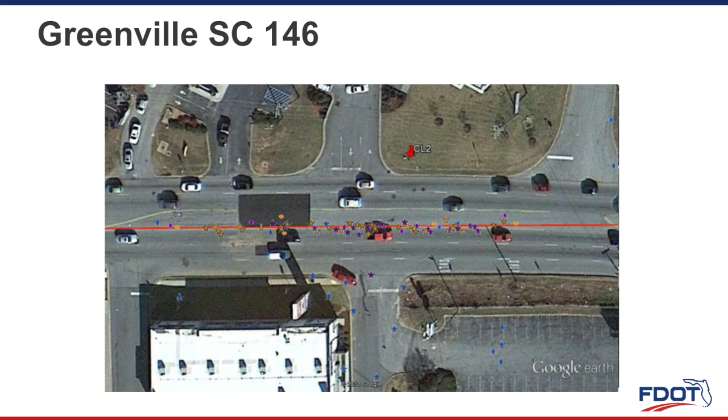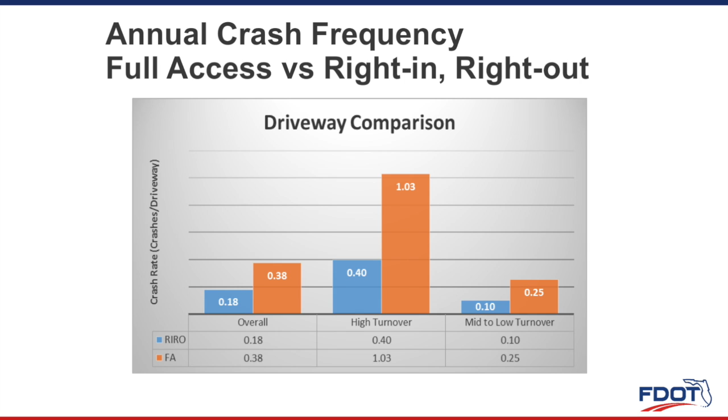And so one of the things that the DOT wanted was facts, to bring back to the businesses and the developers to say, hey, we have data that shows, from a safety standpoint and even operational standpoint, what your business, that driveway will do. Trying to give the DOT ammo to say no, or to say you need to redesign it. So that was the biggie.

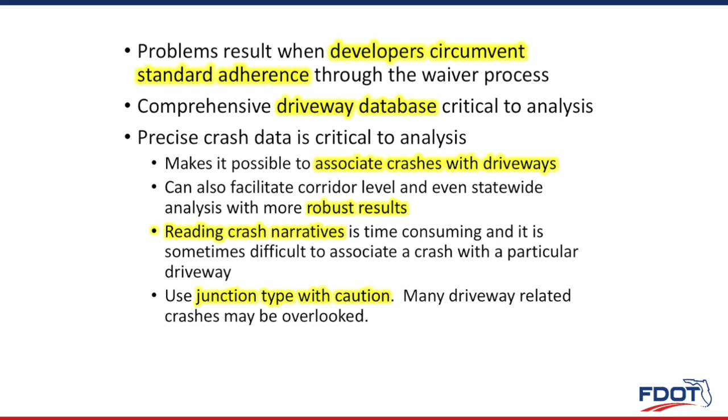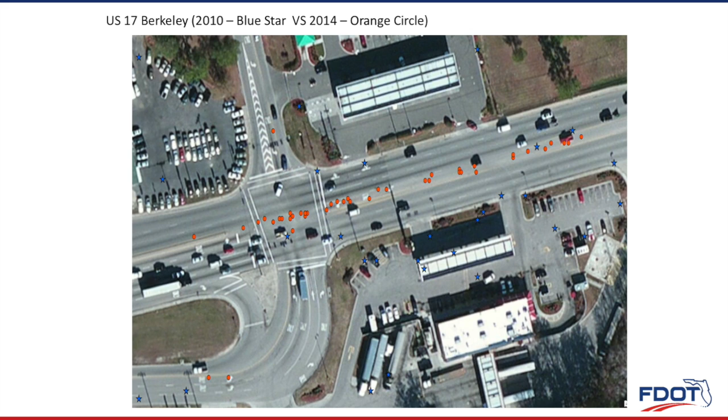Other things, the driveway database that we developed was awesome. It was really big. And then precise crash data is critical to everything that we've done on this project. And now we're going to get a follow-up study to look at how South Carolina DOT can change how they screen crashes and how they identify clusters and safety using precise crash data.

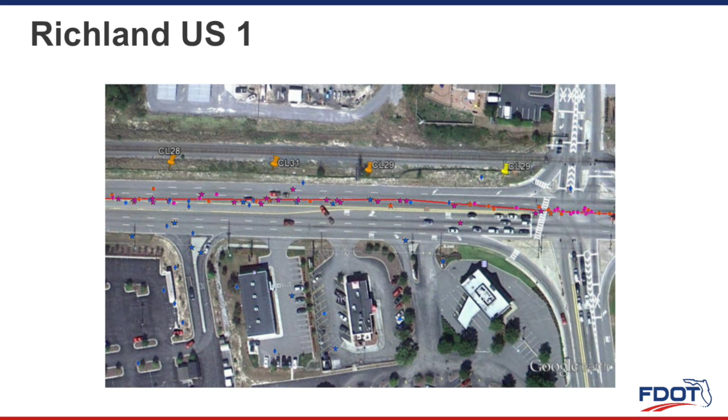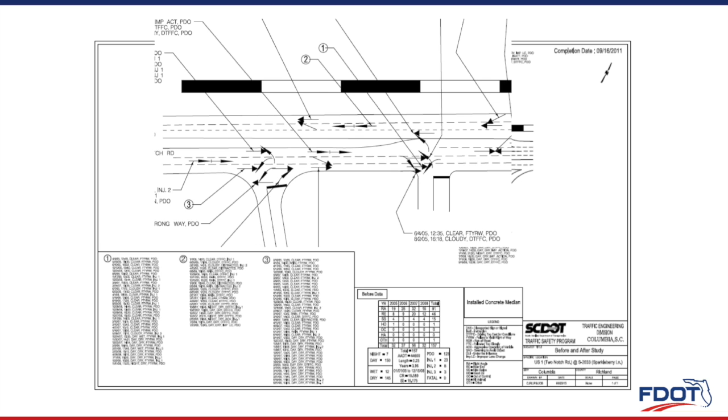So we're going to take a closer look at the benefits of having precise crash data to crash analysis and how it could facilitate different types of crash analysis. Reading crash narratives to draw collision diagrams is just time consuming. And then we found that junction type, it'd be great if the officers were a little bit better trained about how to universally code junction type.

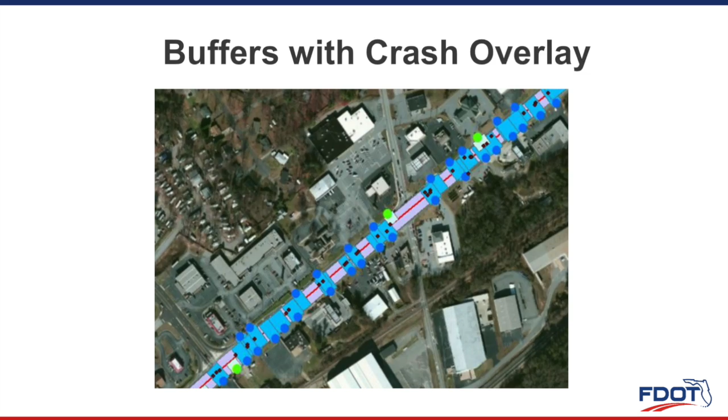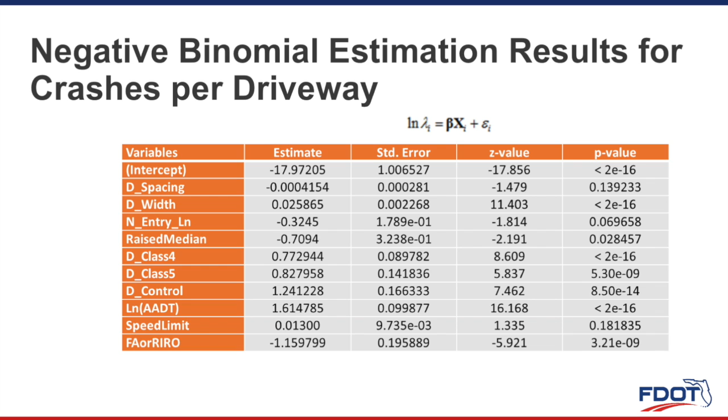Other findings, medians are great in terms of lowering crash rates. Crash modification factor, lower crashes by at least 50% is what we've seen. Right-in, right-out driveways are great because they eliminate conflict points. Again, can reduce crashes by more than 50%. I just want to mention, though, about right-in, right-out driveways.

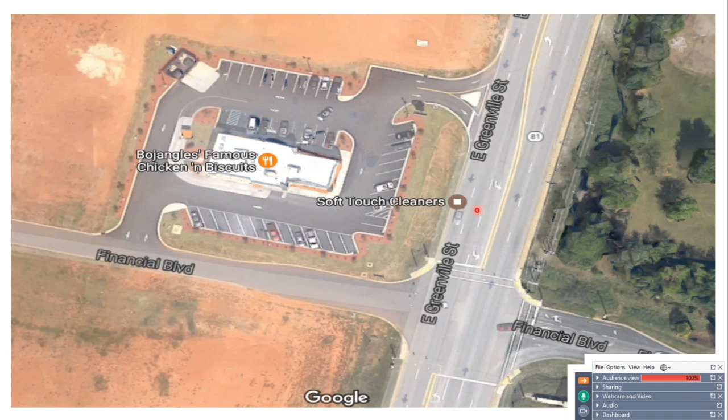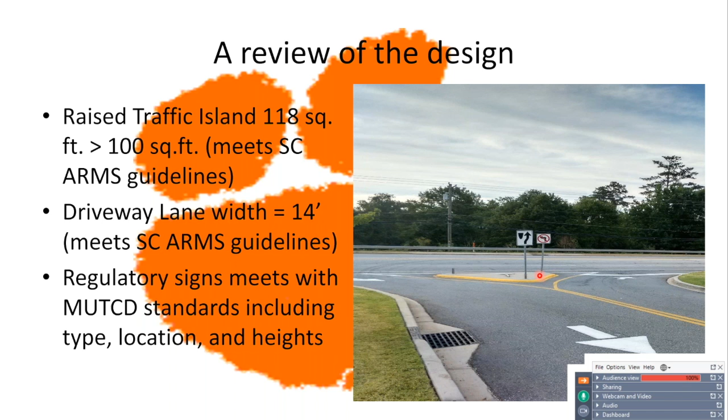When we did our analysis for this year, we used right-in, right-out driveways from the standpoint of medians and then also other types of right-in, right-out driveways. For example, a raised pork chop island without any sort of centerline barrier or delineator, and then other types with just painted islands, some signage and things like that.

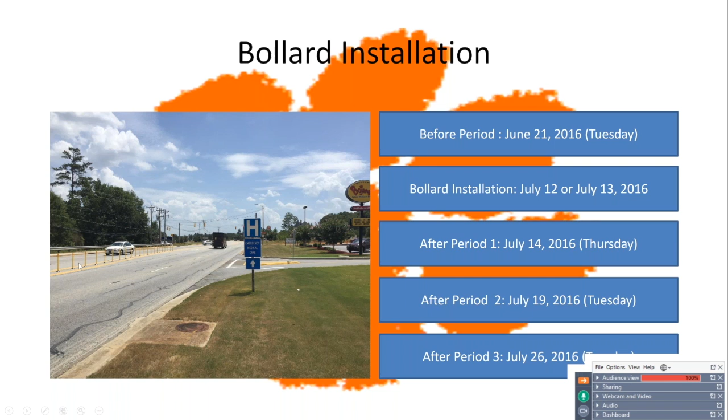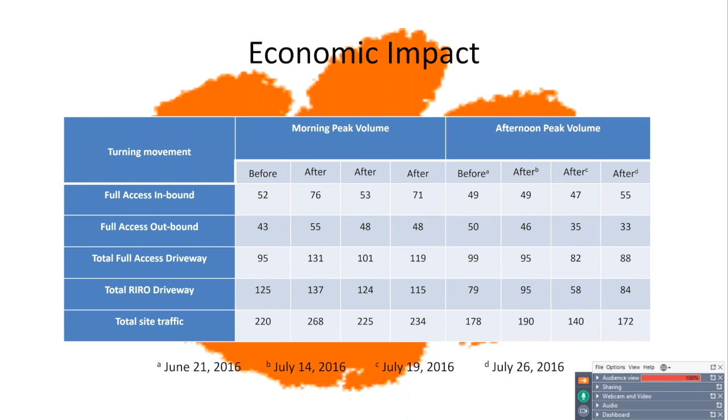And the crash rates are definitely higher for those types of right-in, right-out driveways than those that have some sort of physical barrier. And the bollards are an inexpensive way to actually act as a delineator, though they do have to be maintained. Down in Florida, though, I think you all use a lot of quick curb, and quick curb is definitely better than just simple bollards.

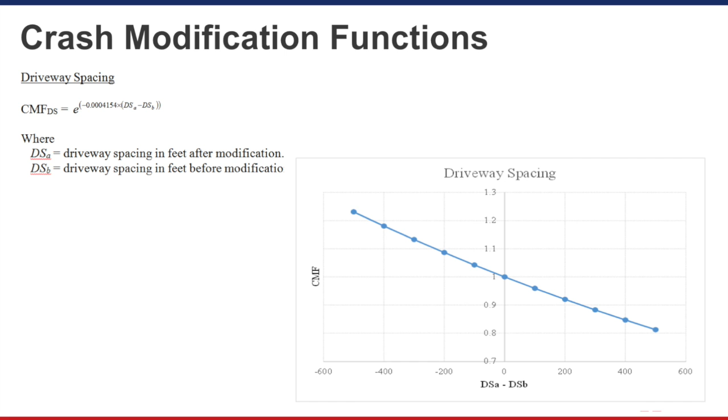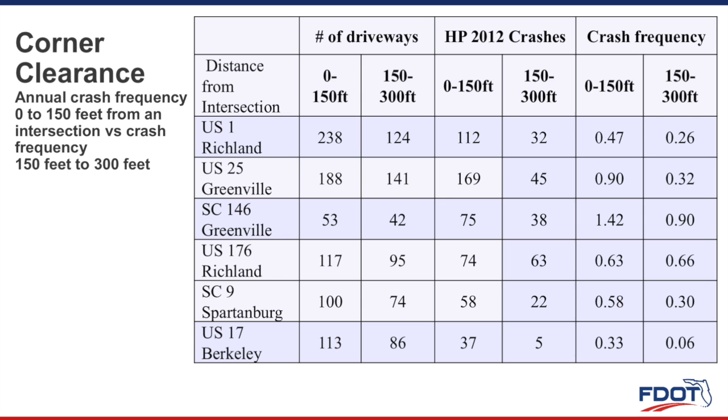Reducing access point density improves roadway capacity, yes, and then driveways within 150 feet of an intersection have nearly twice the crash frequency of driveways between 150 and 300 feet. Good corner clearance will definitely help your access management and your safety at driveways.

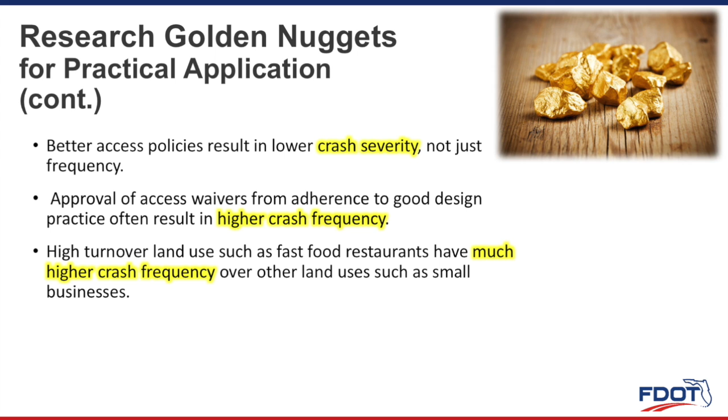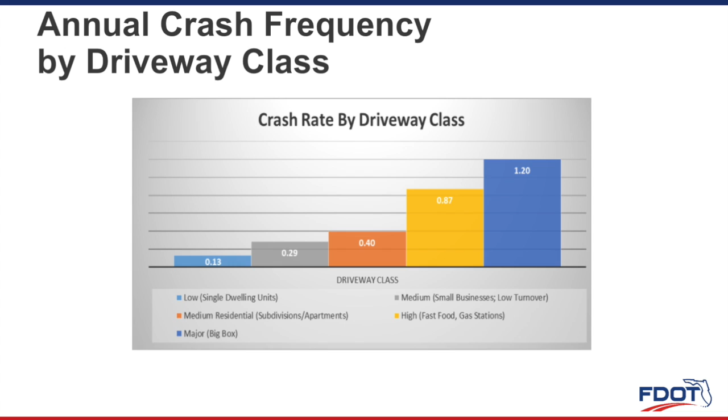Better access policies result in a lower number of crashes and also lower crash severity. Waivers, we talked about waivers, they can be an issue. And then high turnover land uses, they have a much higher crash frequency. Definitely encourage shared driveways, things of that nature, to help reduce the conflicts.